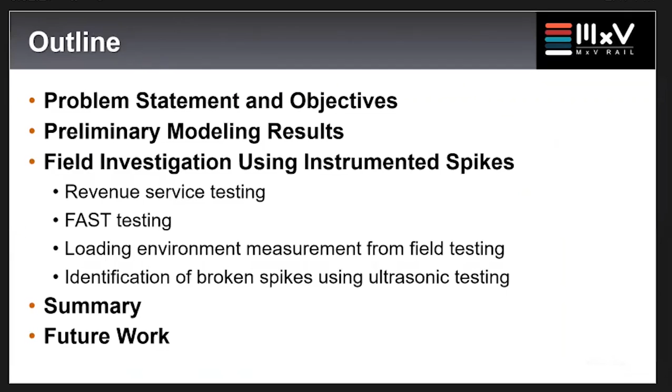So broken spikes typically happen on elastic fasteners, especially on the high rail. Historically, this problem is observed at FAST and in revenue service.

At FAST, it has a 6-degree curve, and we typically run 115, 315 kip cars, so it's a little bit higher than normal railroad operation.

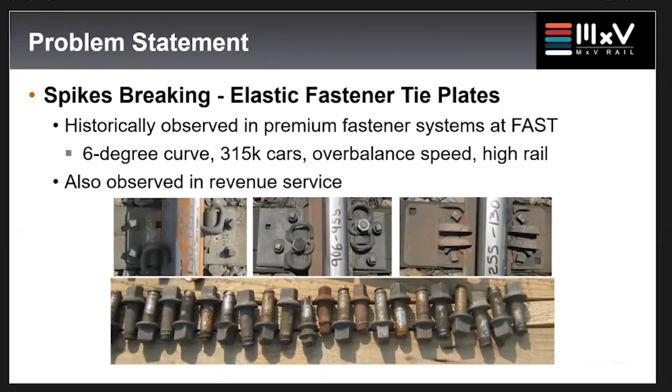We also observe this issue in revenue service, as Marcus and Christian mentioned earlier. This is not only a cut spike issue, it happened on drive spikes and lag screws as well. We believe this broken spike issue is a fatigue failure.

As you can see here, we normally look at the failure plane of the spike. The initiation of the crack starts at the corner of the spike, and then you can see the fatigue ring, and then it propagates, and somewhere here the entire spike snaps.

We also see some fretting and wear between the spike and the plate area, which means there's a lot of interaction between the plate hole and the spikes.

The loading environment, as the previous presenter mentioned several times, can be a combination of the dynamic train loads laterally and vertically, and it also comes from some longitudinal load from the braking and traction, and thermal forces as well.

In order to get the loading environment of spikes that is actually seen in track, we developed this instrumented spike. The idea of instrumented spikes actually came from Norfolk Southern back a couple of decades ago.

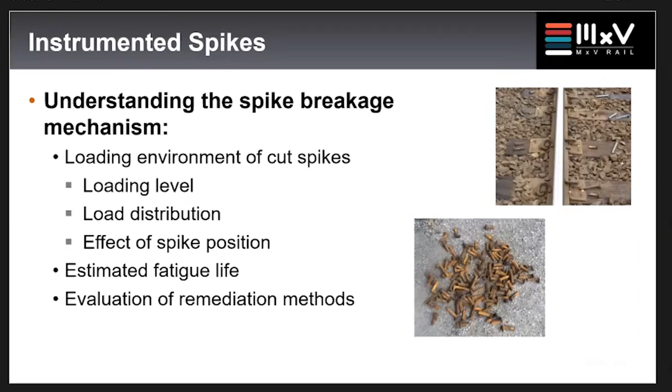And what can instrumented spikes tell us? It will give us the loading level of the spikes, and it will tell us how the load is distributed among the plate and along the track. It will also tell us the effect of the spike position, since there's a tolerance between the spike plate hole and the spike, so the spike can be anywhere in the hole. I'll show that later. Based on this loading environment of spikes, we can estimate the fatigue life of the spikes, and the last one can help us evaluate what remediation methods are effective.

First, the revenue service testing. I'll give some background on the test location. This test was at Benny Curve, Pennsylvania, conducted in 2018. It is an 8.4 degree curve with 2% grade. Main one mostly had loaded and downhill traffic, and main three mostly had empty and uphill traffic. Train speed here was about 10 to 50 miles per hour, under the balance speed. We didn't have many instrumented spikes at that time, so we only instrumented one high rail plate per track.

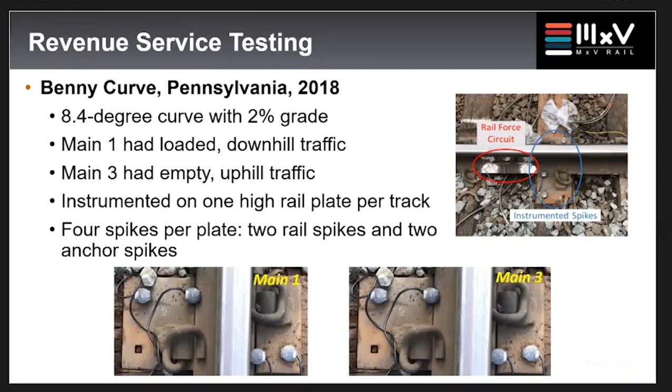This spiking pattern is 4 spikes per plate, with 2 rail spikes and 2 anchor spikes, as you can see here. The FAST testing environment is a 6-degree curve with only 0.2% grade. We have 2 locomotives and 45 cars in this case, and the operation speed was 40 miles per hour, which is overbalanced speed for this track. At this location, we have 3 spikes per plate, and they're all anchor spikes.

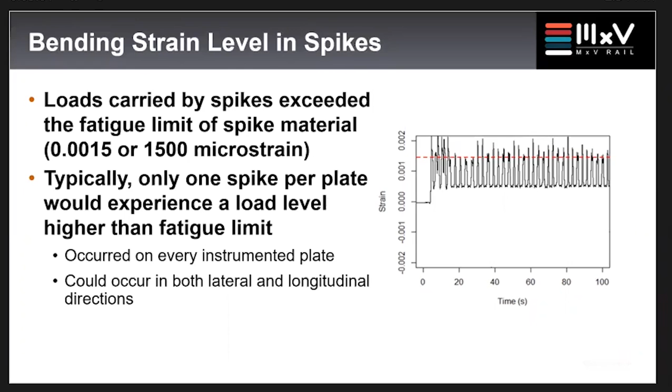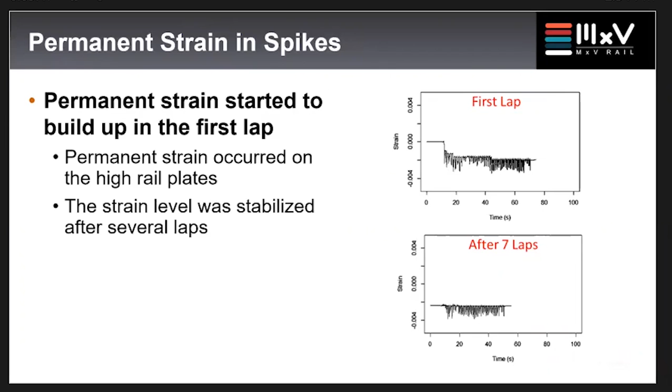Other than the loading strain level, we also investigated the distribution of bending strain in spikes. This table shows the spikes on one plate, which had 3 spikes and was tested at FAST. In the lateral direction, one spike was taking over 60% of the load transferred into this plate, and in the longitudinal direction, 78% of the load was transferred through this one spike. This tells us the majority of the load was taken by just one spike on the same plate, so the load distribution was not even.

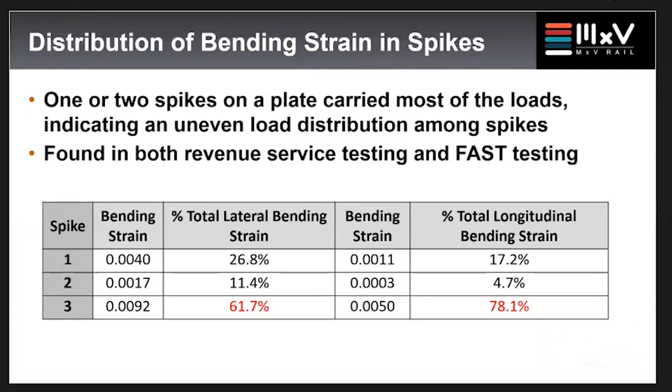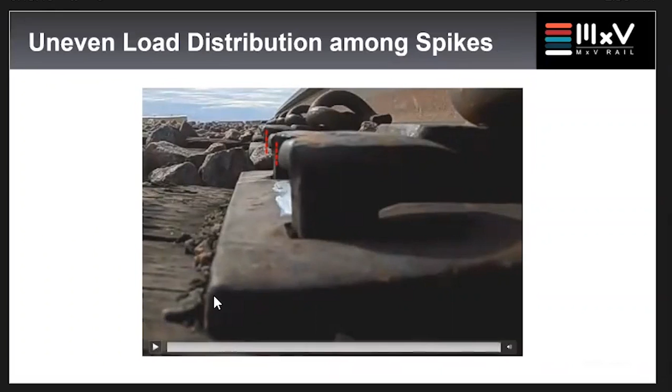So that means the front spike was seeing more deformation, possibly higher stress than the other spikes on that plate. So in order to find some remediation methods and evaluate how effective they are, we conduct this field testing at FAST on different fastening systems. We have case 1, that's the 18-inch elastic fastener with cut spikes and it's anchored. Case 2 is the same plates and the same spikes, but it's a non-anchored situation. Case 3 is a curved block plate with cut spikes, and the entire section was anchored.

The curved block was only installed every 3rd tie in that area and intermixed with standard AREMA plate. The last one is the AREMA 16-inch plate with cut spikes that's anchored track. With these 4 cases, we try to understand what's the loading environment difference. Case 2 and case 1 and case 3 were considered as the 2 remediation methods that railroads would like to test.

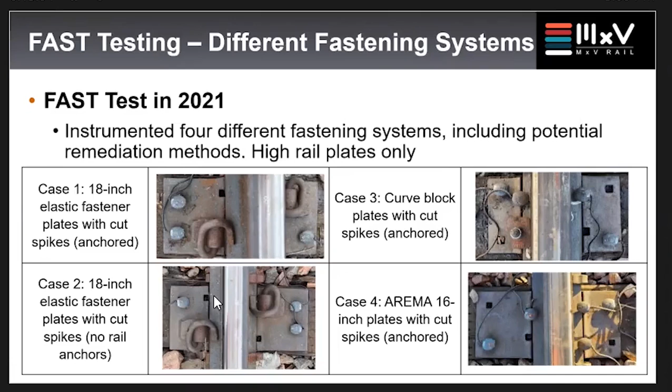The analysis we have done with the data is to look at a peak-to-peak difference of the strain gauge level. Peak-to-peak strain gauge difference is defined by when the train wheel is right on that spike, what's the highest strain level the spike is seeing, and once in between trucks, back to zero of the strain level. So this peak here to the peak here at the bottom, that's considered as the peak-to-peak strain.

This indicates what the dynamic train forces actually affect the spike strain level. As you can see here, case 1 to case 4 in the lateral direction, most of the microstrain was below 1500. That means the majority of the spike load that they are seeing is actually below the fatigue limit.

However, you can see here for case 1 and case 3, they're about 1.6 and 6.2% that are between 1500 to 2000. 2000 is typically considered as the yield point, which will cause some permanent bending in spikes. Case 2 has the highest percentage when the strain gauge level was above 2000 microstrain.

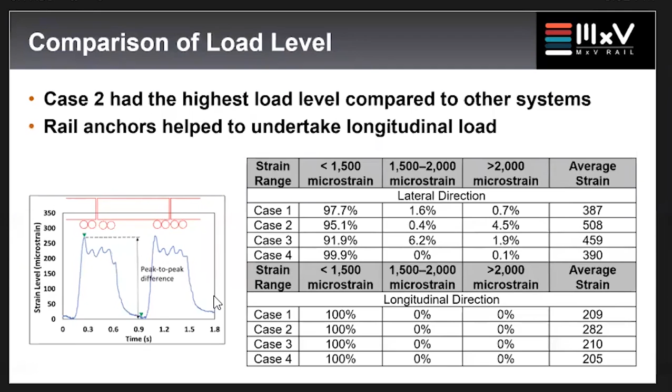So this is the handheld ultrasonic testing we have done for broken spike detection. The research was supported by the FRA. We have tested both single element and dual element transducers, with different frequencies and diameters and the roof angle, which are the properties of the transducers used to detect broken spikes.

With the field testing, we did a blind test. We conducted it on both cut spikes and drive and screw spikes. Only the cut spike detection was successfully reported and with no error. However, for drive spikes and screw spikes, according to their complicated shape and some indentation on top of the spikes, it's very hard to use ultrasonic testing to detect where the failure plane is in track.

But this test definitely gives us some confidence in ultrasonic testing because it can report the cut spike detection successfully, and it could lead to some other research to help us achieve automated broken spike detection, because we have this handheld UT already confirmed the spike detection can be feasible.

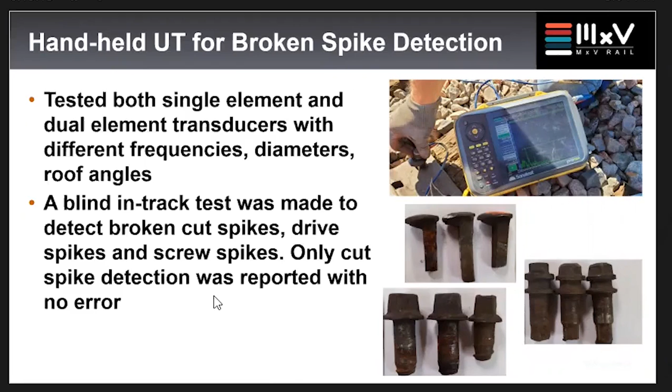So to summarize my presentation, the first, the load taken by the spikes could be high enough to cause fatigue cracking and even permanent bending.

And the second is the field test result shows the broken spikes is a result from the longitudinal load and the lateral load as well.

And the load environment in the spikes on the same plate was not evenly distributed. This could lead to kind of a virus effect. Once one spike is broken, the load will transfer to the other spikes on the same plate and cause the sequential breaking on spikes.

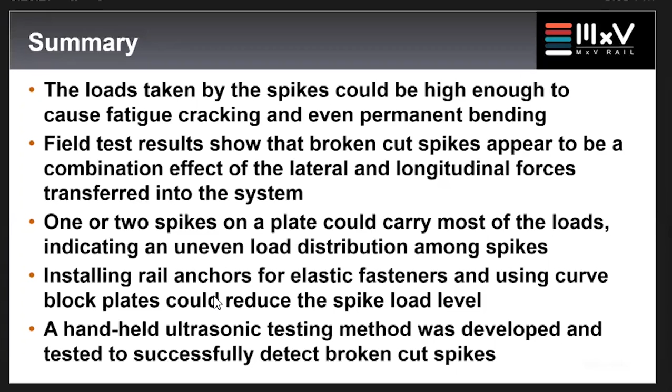And also, based on the FAST test, we are installing rail anchors for elastic fasteners. Using curve block plates could reduce the spike load level. And lastly, we test the handheld ultrasonic testing method, and it was successful in detecting the broken cut spikes.

For the future work, we will continue to monitor the in-track performance of the spike conditions on different fastening systems. So remember, case 1 and case 3 were two remediation methods that we are testing. They accumulate about 340 MGT so far. We haven't seen any broken spikes yet.

However, the elastic fasteners without rail anchors start to have broken spikes at 200 MGT. So it broke sooner than the other two remediation methods that we are testing right now.

The fatigue analysis, we would like to perform this to estimate the spike service life in different fastening systems using the instrumented spikes data. We may not have a silver bullet to solve the broken spike issue, but...

If we can elongate the spike service life to a certain point, then when the rail gang or tie gang come here, they can start to change out the spikes without having breakage in that track before they come here. So that's our goal, to help railroad elongate the spike service life.

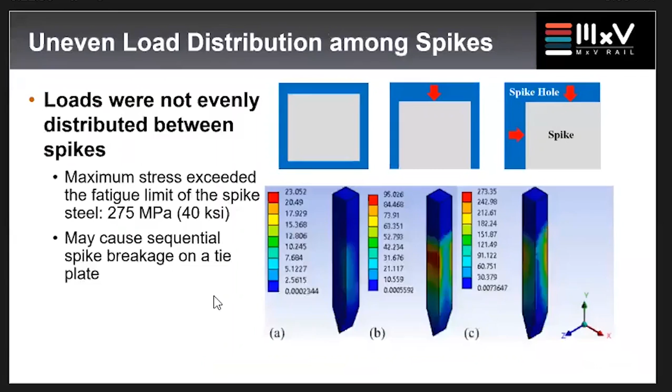Questions for Dr. Gauss? Again, thank you. Question about the test train, when you have instruments—we just have two in the front. Two on your test train? Yes. We have two locomotives and 45 cars, because I would like to change direction during the testing.

So we just run this during the day, so have a shorter train running, just on one end. I'm hung up on the fact that you're running at overbalance here. Seeing the failure.

So I think both—so the 40 miles per hour is the overbalance speed. We have seen in both situations, either under balance speed or over balance speed, the spike will see a loading environment higher than the fatigue limit.

So you're in the same section? Yes. High rail only. Yes. Yeah, so this fastening system starts to have broken spikes around 200 MGT, and once we put some anchors on, it lasts longer.

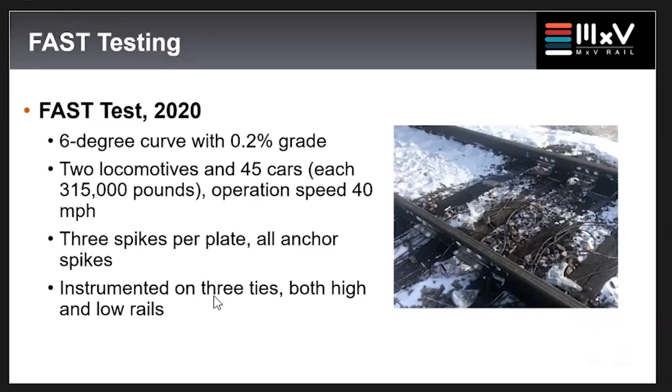Any—go back to the picture of the broken spike. Well, there was one where it showed a crack right here. This one? Yeah, that's right there. So it's sheared.

Any other questions, comments?